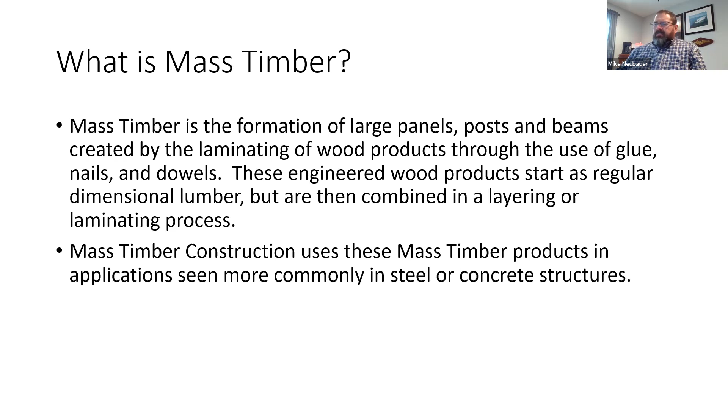Okay, start off with just what is it? Mass timber is really just large panels and beams that are made of smaller pieces of lumber. So it's laminated lumber through either nailing, doweling, or glue. In a little bit, we'll talk through the various types of mass timber components that are used in various parts of the building process.

I'm going to show you a couple of examples up front on the types of buildings that are out there now. Start with the absolute largest right now. Believe it or not, it's actually in Milwaukee, Wisconsin, the Ascent. It's a 25-story luxury apartment building. It just opened up this summer. And we will talk also about building codes and the heights that can be built under the international building codes.

Let's look first at the Ascent here. Well, it's taking longer than I expected. Okay. So here what we have is a podium, and then there's 19 stories on top of it, is what these pictures cycle through. But I did at least want to show you that.

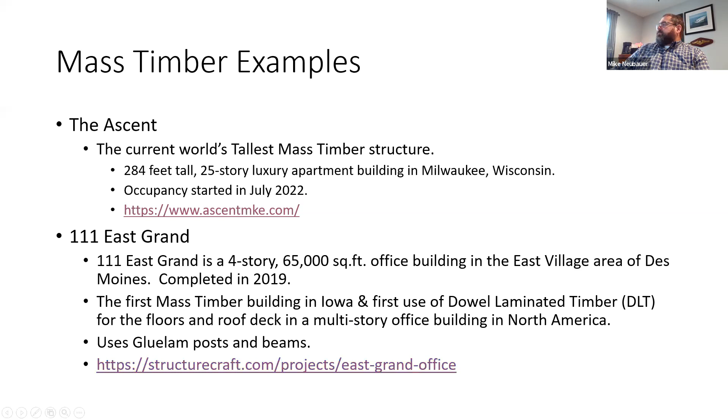So you can see in this, really, you've got beams and columns or posts, and then the decking. The decking on this, which is the floor or the ceiling, depending on where you're standing, I guess, is actually called dowel laminated timber, which is a form of mass timber, but it's individual pieces of lumber that are doweled together, and that's what holds them together. Believe it or not, there's actually not any glue used in it at all.

And let's see. So you can see the building here. These columns here are actually steel columns that are clad on the outside to look like that. But the rest of the building, other than these along the side here, once you get up inside the building, are all mass timber construction.

What's interesting about this one is this back wall here is a concrete shear wall that separates the parking garage area from this building. They are physically separate, but that's a little different setup. And we'll talk a little bit more about the concerns that come when you have vertical structures of concrete or steel tied in with the wood.

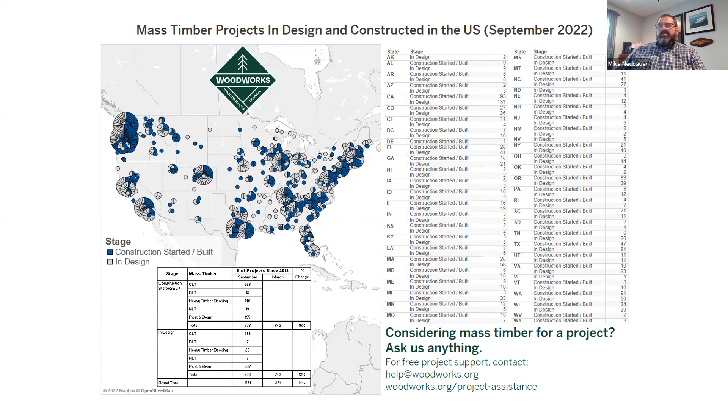This to me tells me that we're going to see some acceleration in this type of construction. And that was really the first thing I wanted to do, is just bring an awareness to everyone that this is out there now, and that it appears to be accelerating. You can see that just from March to September, there was a growth of 90 some buildings into the design, and a similar number, almost 100, in the under construction. So it is definitely a growing area. It's still a small number, but it is definitely growing.

Okay, now I want to talk a little bit about how mass timber is different than light frame, the typical house construction that you see, or commercial buildings that use normal frame construction. The biggest differences really come in the type of components that are used for the structure. In light frame construction, you're looking at 2x4s or 2x6s for the vertical components, the studs in the wall. And then the horizontal may be 2x6, 2x8, 2x10, or even 2x12s. Or you may see laminated veneer lumber, especially where you're looking for larger spans, something that has to go across a bigger distance without any kind of support in between.

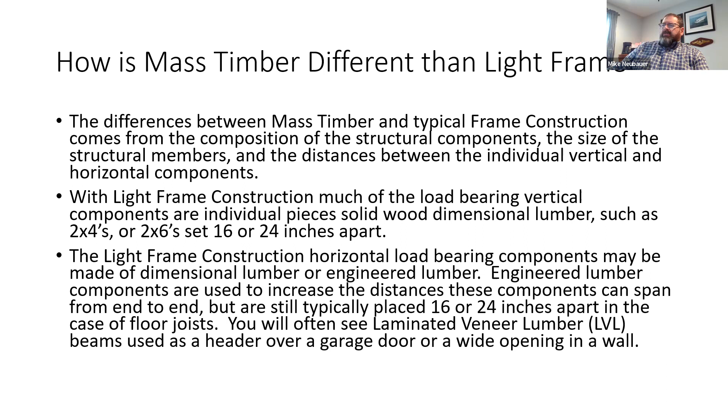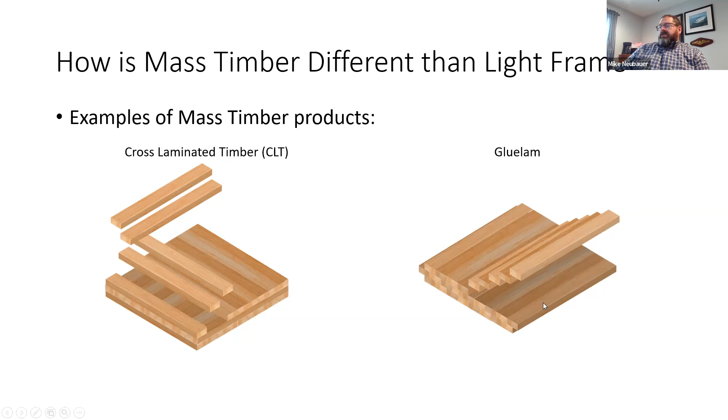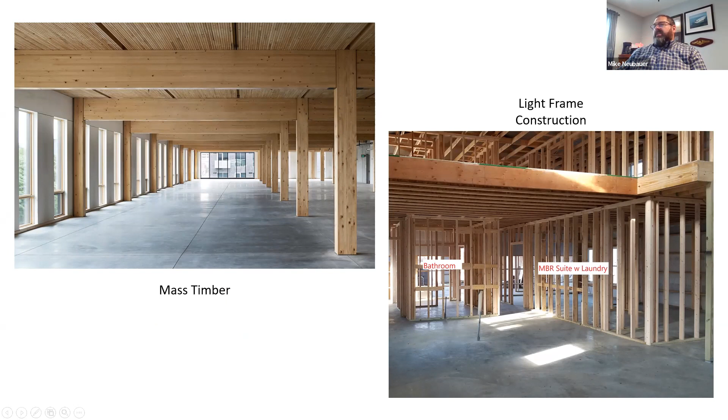Dowel laminated timber is very similar to the nail laminated, with the difference being that instead of nails, you're using dowels. The dowels typically fit very, very tight, to the point that the manufacturer will use a moisture difference between the main components and the dowels. The dowels will be dried down to where they shrink in size slightly, and the moisture will be a little higher on the actual dimensional lumber that's used. So when it's pushed together and they acclimate, you'll see the dowels swell slightly, which will increase their holding power.

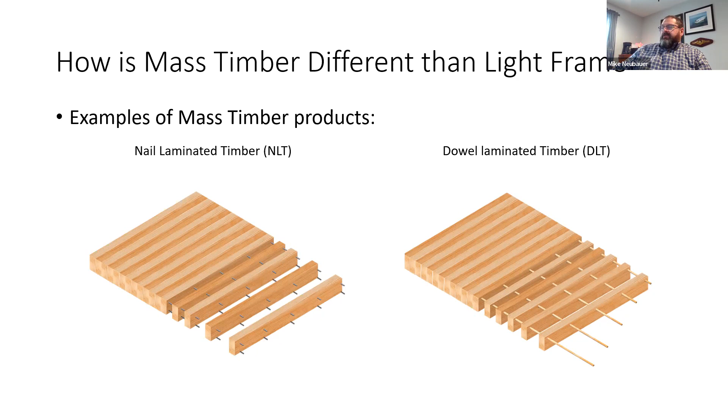Advantages of mass timber. The first one is really decreased weight. When you compare to other types of construction where you can have large spans between columns, such as concrete or steel, obviously the weight of wood is much lower. The advantage there is that if you don't have as much weight above the ground because of the structure, that means a smaller foundation. It also means that because there's less mass up there that can be swinging around in an earthquake, plus the flexibility that's inherent in wood, you actually have some improved earthquake resiliency.

And another use here, because of the reduced weight, is that you can use mass timber over an existing building. Out in the Northeast, where I actually do my underwriting, mostly New York, you'll see a number of projects where they're adding stories on top of an existing building, and this really lends itself well to that, because you've got less weight up there that you're adding.

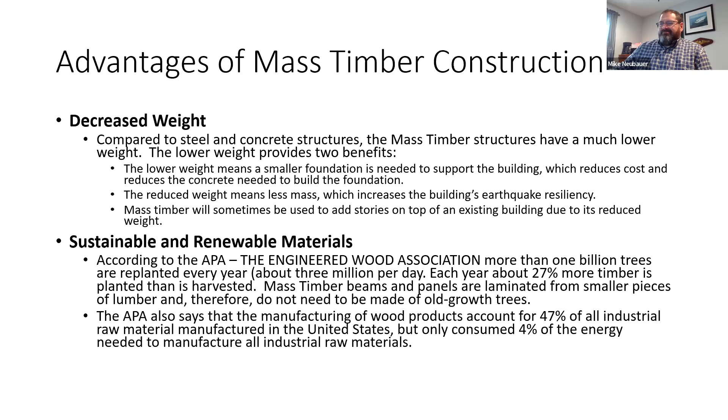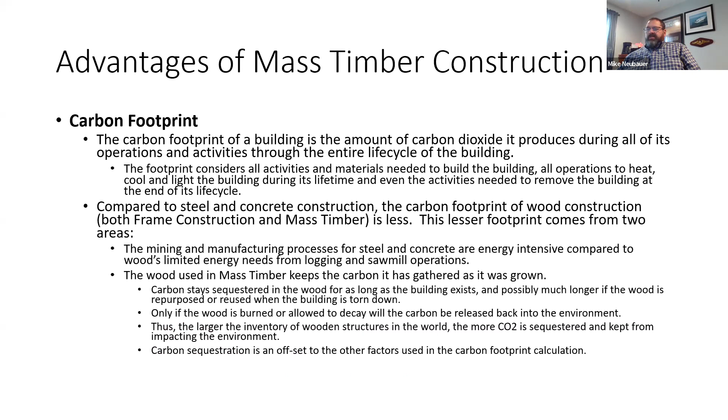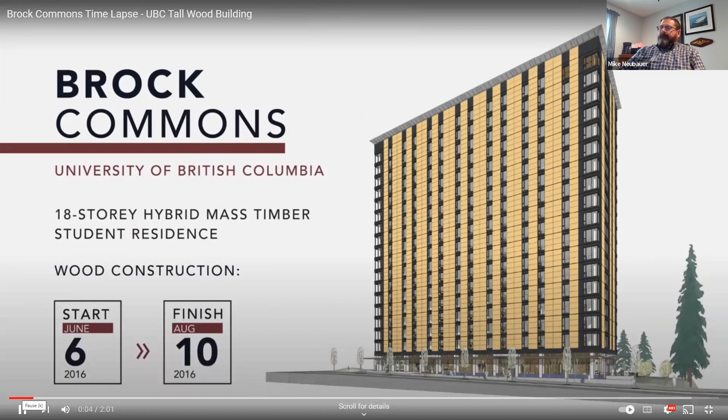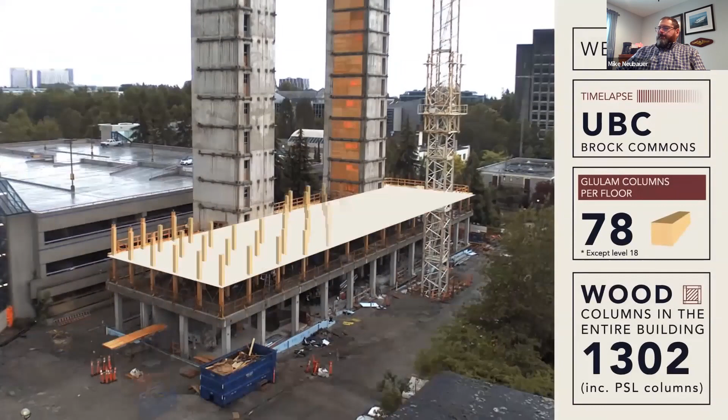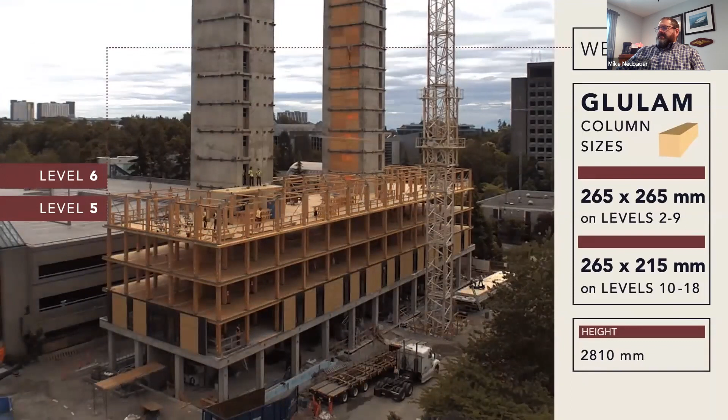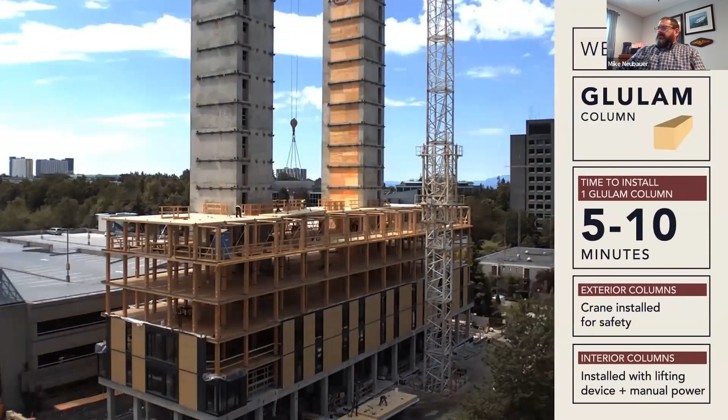So now we're going to look at a couple of examples. The first example is Brock Commons. It is a job that was up at the University of British Columbia, 18-story building, 9.5 weeks to complete the structure and get it enclosed. We'll just play all the way through this. So you can see they did have a 1-story podium here. Three weeks in, and they're already up on the 5th floor. And time to install a column, 5 to 10 minutes. Doing 2 floors a week.

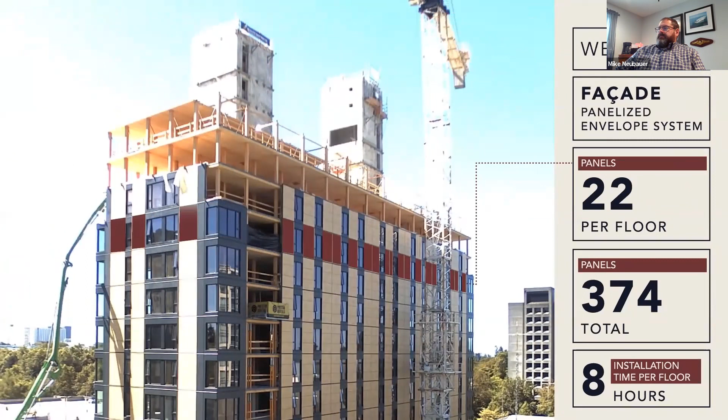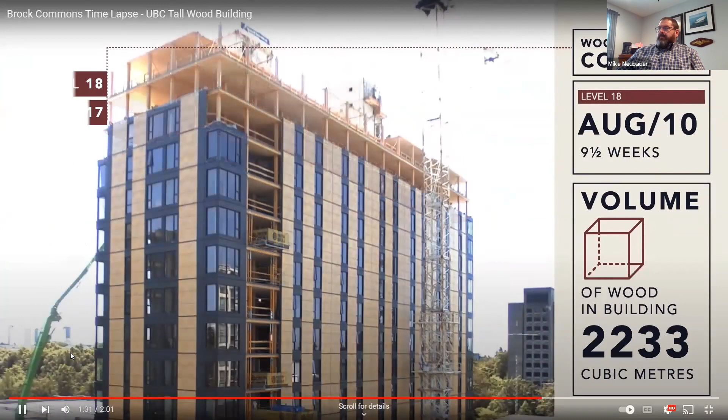Okay, they made the wood structure complete, 9.5 weeks. Wood in the building, 2,233 cubic meters of wood. That's a lot of carbon that's been held. When you talk about carbon sequestration, one of the things is that as long as that wood continues to exist, that carbon that grew those trees in the first place, with the CO2 and photosynthesis and all that, stays within that wood and will be there indefinitely.

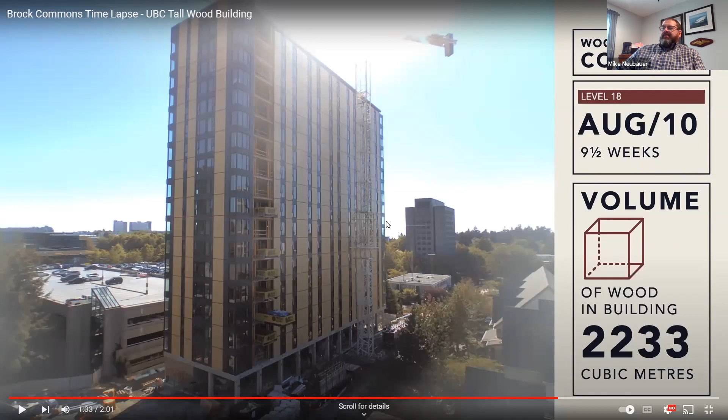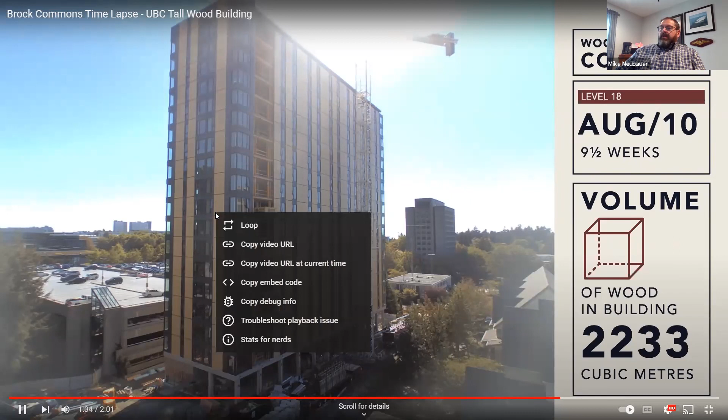It's only if you were to tear it down and it decomposed, or if you were to burn the wood, that the carbon would be released. So it's possible if this wood is recycled that it would never go back into the atmosphere at all. Okay. We'll get rid of that.

The next one we're going to look at is just a small piece of a video where you can see the construction process from up close, where they're talking about the cost savings that comes from the wood and the weight and the less materials or less labor costs.

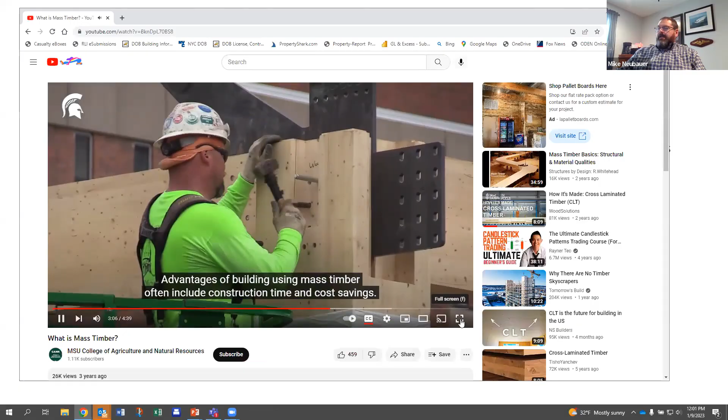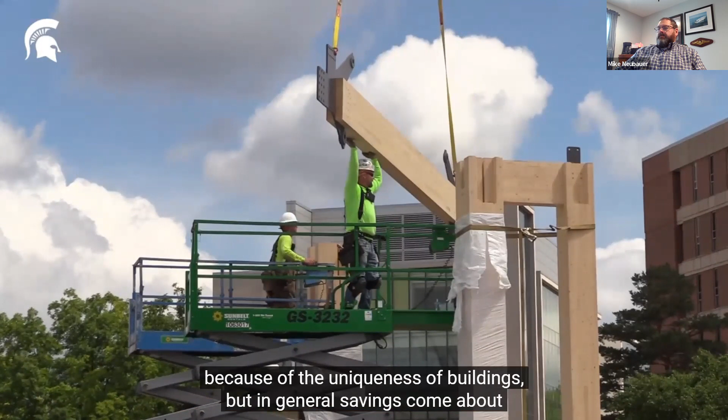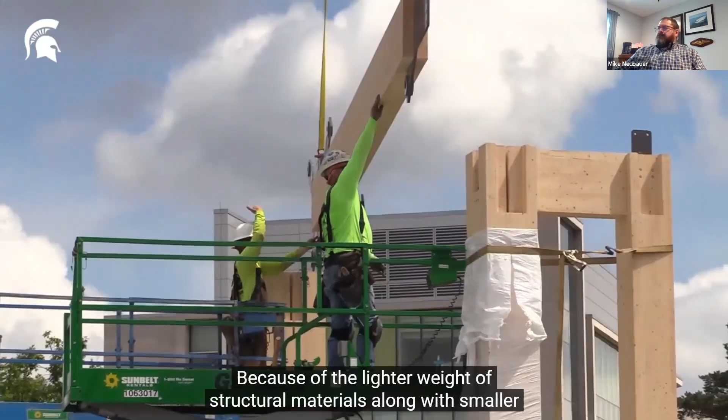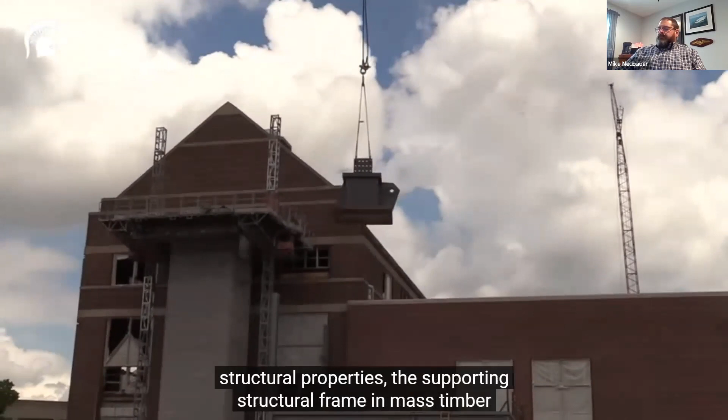Advantages of building using mass timber often include construction time and cost savings. The sources of these savings will vary from project to project because of the uniqueness of buildings. But in general, savings come about because of the relative lightweight of mass timber elements compared to other construction materials. Often this means being able to use a smaller crane. Because of the lighter weight of structural materials along with smaller cranes, we also see smaller crews. Because CLT decks and wall panels have inherent structural properties, the supporting structural frame in mass timber buildings often consists of fewer individual components. This means fewer pieces to lift into position, meaning faster time to completion of the structure.

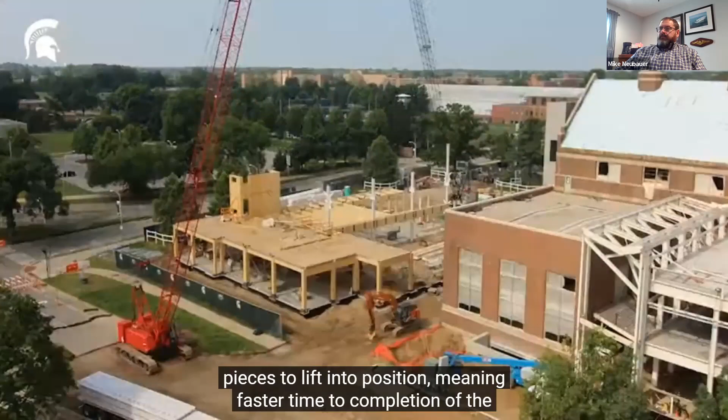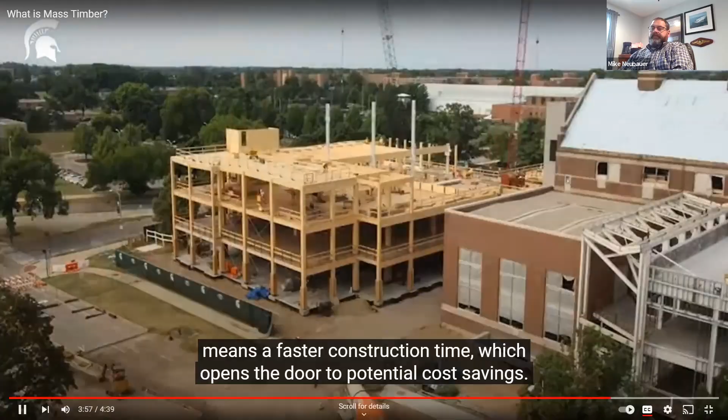The net result of these changes in the construction process means a faster construction time, which opens the door to potential cost savings. I hope you've enjoyed getting a chance to look at the STEM building on the campus of Michigan State University that's under construction.

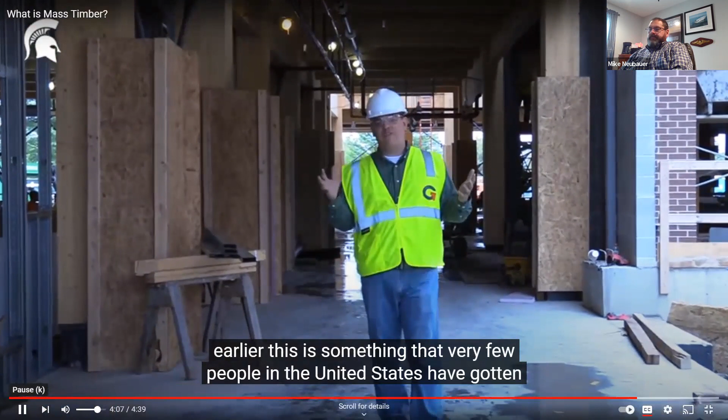Like I said earlier, this is something that very few people in the United States have gotten to see before. So I hope you've enjoyed this glimpse into something that we expect to see more and more of in the United States over the coming years. Be sure to come back to campus in the fall of 2020 when you can visit the STEM building after it's been complete.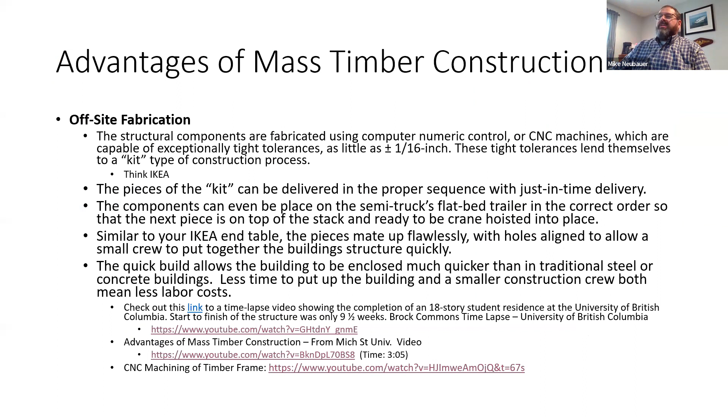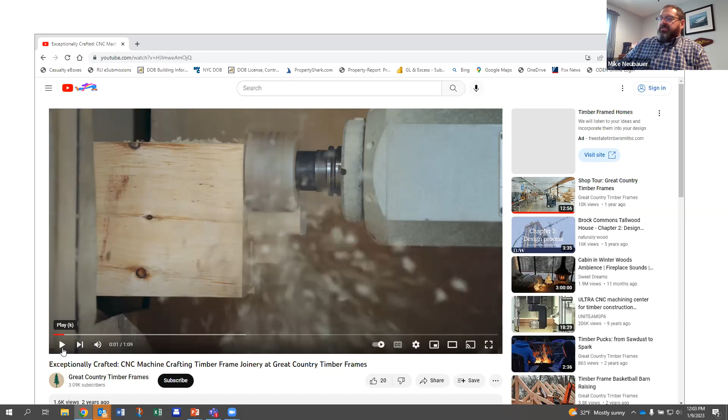The last video I want to show you here is actually the CNC machining process. This is a short minute-long video, but it gives you some kind of an idea. Now what you're looking at here is actually timber framing for what would be a builder of a home. But the only real difference in the process is going to be in the wood being one piece versus laminated that you would see in mass timber construction. But similar machines, similar tooling.

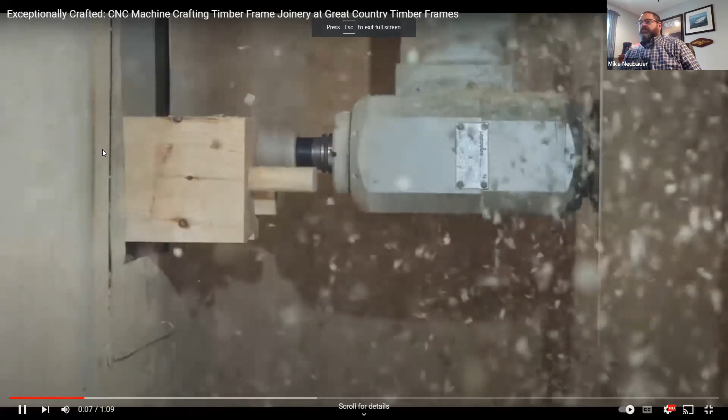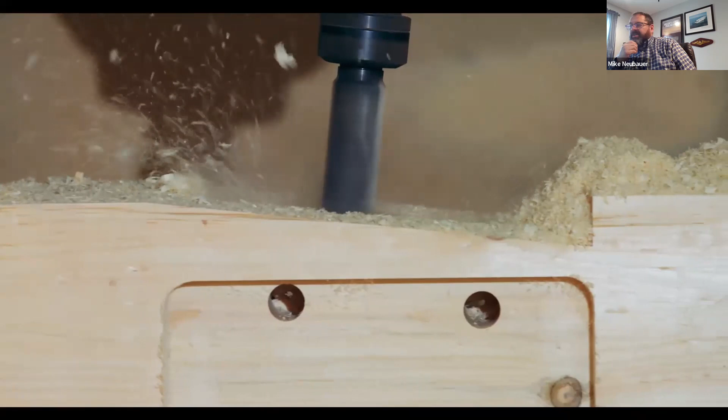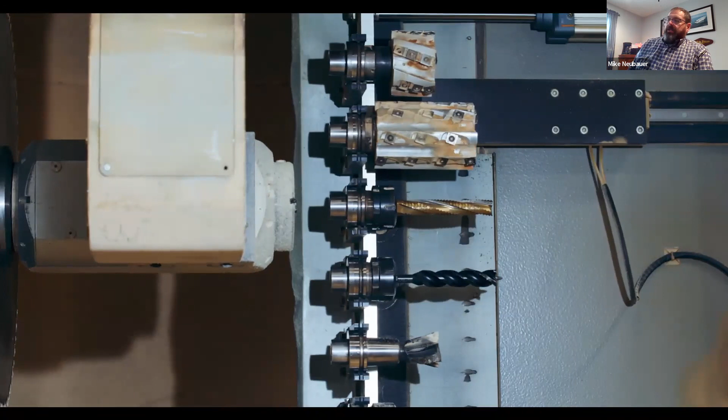Look at the precision at which it cuts that angle out. Just hits it exactly right. This is an automated tool changer.

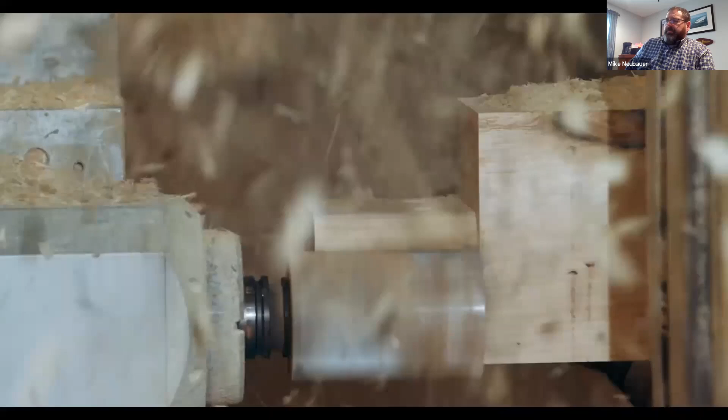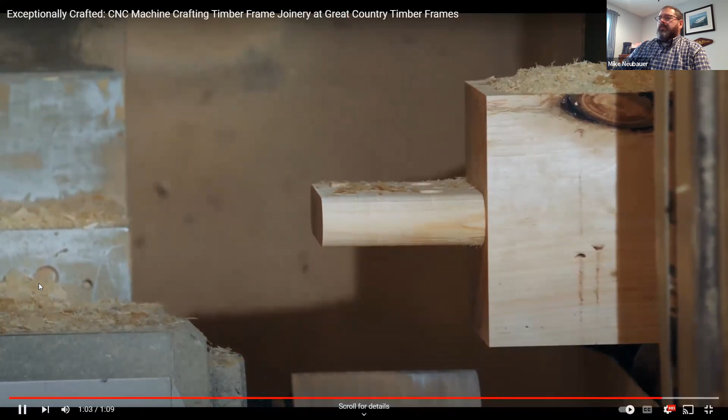Let's see, okay. Other advantages of mass timber construction: thermal performance. Wood has some insulating capabilities on its own that are about 10 times that of concrete and 400 times that of solid steel. So one of the advantages then is you don't really need any

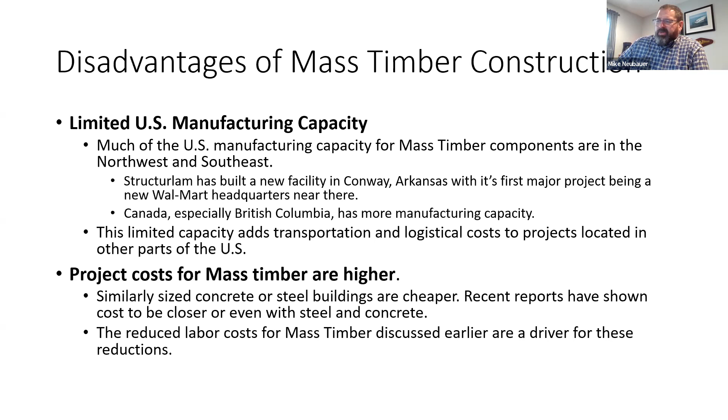Limited expertise. This is still fairly new, especially in the United States. But there are some areas that have expertise that can help. So one of the things with mass timber is that because the design and the manufacturing work for the components is done up front, you really need all that engineering and design right on the front end. And then that's coupled right into the manufacturing process. And so this stuff all takes a while to get there.

And with limited experience in this within the country, the number of engineering and architectural firms that have had experience is somewhat limited.

I saw a video on the Ascent building, which, by the way, came from the PBS station up in the Milwaukee area, I believe, and it actually interviewed the lead architect on that job, and he said that he had never built a mass timber building before he decided to build the world's tallest one. So he said he knew about 5% of what he needed to know. Boy, talk about jumping into the deep end. So he's certainly confident in his abilities, I guess.

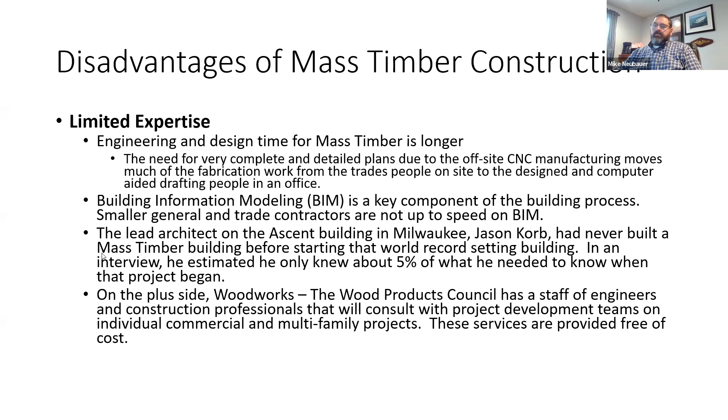One of the other disadvantages here is really building codes. The 2021 International Building Code is only in about a fifth of the states right now, so it's still making its way. And actually, there's a 2024. It looks like every 3 years a new International Building Code comes out that changes things, tries to keep up with technologies. And you'll see in another slide in a little bit, from 2015 to 2021, the changes that allowed tall timber construction within mass timber to start to happen.

But you'll see that there are still a number of states, New York as an example. The city of New York has its own code separate from the state of New York, and they're still on a 2009 International Building Code. And so they're limited right now to 6 stories. There was just recently a condo building completed in Brooklyn. That was, I believe, a 6-story building. But there's not nearly as much as you would have expected from such a large metro area, and that's because they're just not up to date on the building codes.

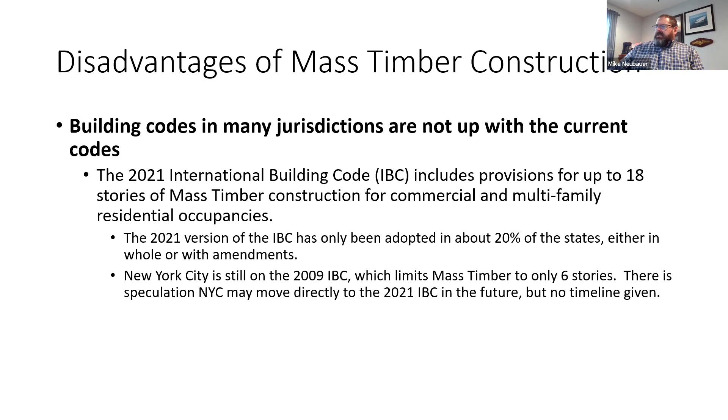And another disadvantage right now is a lack of knowledge within the insurance space and in the financing of these projects. On the insurance side, ISO several years ago did a paper talking about mass timber construction and how it was different than frame construction, but they said they really didn't have any reason to separate mass timber out from standard frame. So if you were to look, you'll see that mass timber still fits within the frame construction definition. Eventually maybe that could change. We'll talk a little about fire coming up here too, and so maybe you can see some differences here.

And also on the financing side, mass timber, because of the way it's designed and manufactured on the front end, there's a lot of value add that's done before any materials ever get to the site. They're already machined, they're really just ready to put up.

It's not the normal S curve you might see in construction of a frame building, where raw materials come to the site and then slowly over time, as walls get put together and go up, the costs start increasing. There's a lot more cost before it ever hits the site, and then it goes up quickly. So that changes how early in the process the financing needs to get the cash out there to pay for all of these materials that are coming in already pre-finished.

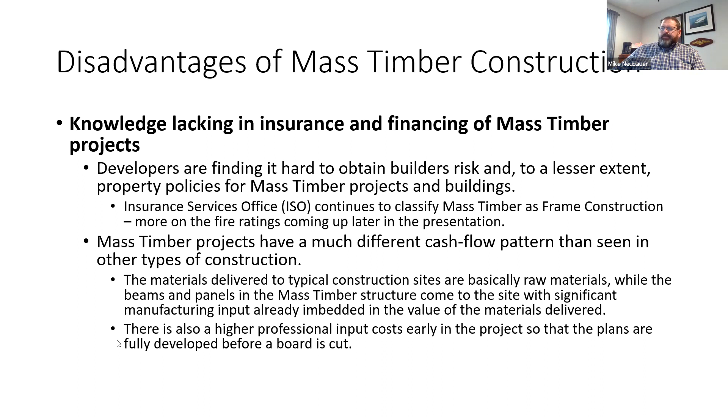Mass timber fire rating. One of the things that was necessary in order to allow for the tall buildings within the mass timber classifications is being able to meet the fire codes, 2 or 3 hour codes. You'll see that there has been testing done, and it continues today. There's still more and more testing, but what they're finding is that mass timber acts more like a tree than it does like normal 2x4, 2x6 frame construction.

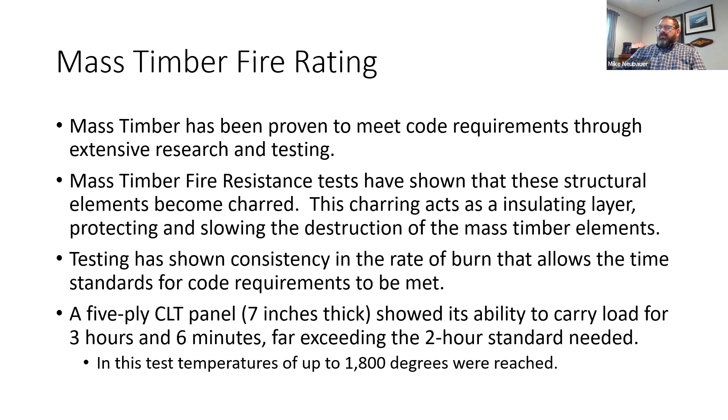Here the example is a 5-ply cross-laminated timber panel, which is about 6 or 7 inches thick, that was able to carry the load on it for over 3 hours, far exceeding the 2-hour standard. You'll see in the next slide how that plays out in the actual wood itself. When the dimensions needed to carry loads are determined, in order to meet the fire rating they have to be essentially oversized so that as they burn down, you can still meet the rating.

What you see here on the right hand side is the charring on the outside of the burning piece of mass timber lumber, for lack of a better term, which will actually act as an insulator to keep the inside cool. And so it slows down the process. You've seen how fast kindling goes when you use it to start the fire in your fireplace. But the large logs can last for several hours before they're burned up. That's because as it continues to burn deeper and deeper, it takes a while, and that outside actually helps to slow down that process.

With a 2x4 or 2x6, the normal dimensional lumber that's used in frame construction, you've got wood that goes up quick and is gone. Now the lumber that's actually in here is no different than those 2x4s and 2x6s. This is still spruce or pine. It's still the same lumber. The difference is just that because it's made bigger, it actually slows down the process. Individual 2x4s would lose their structural, load carrying ability very quickly, where this won't.

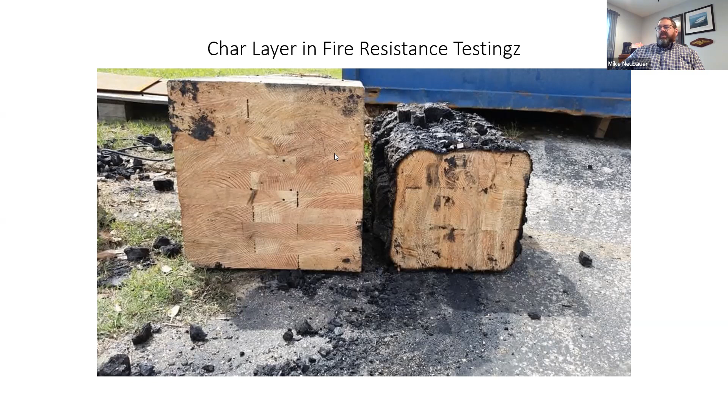Okay, 2021 International Building Code. When you look back at 2015, this type 4, now HT, was HT heavy timber. You're limited to 6 stories, 85 feet maximum, but now there are new classifications that let you get up to 18 stories, 270 feet, large area. And this is across really all occupancy types too. When 2021 came out, type 4 became type 4 HT along with type 4 A, B, and C. So you'll see that now it's split 3 different ways.

One of the big differences between the 3 is how much fire resistant covering there is, drywall, that gypboard. In here, almost all of the structure needs to be covered. In this one, there's a percentage that can be uncovered, and actually with the 2024 code, that percentage is going up to 100%, as continued testing has shown that it'll get the fire rating needed even without that protective layer on the outside. And then here we're already at 100% in the type 4C.

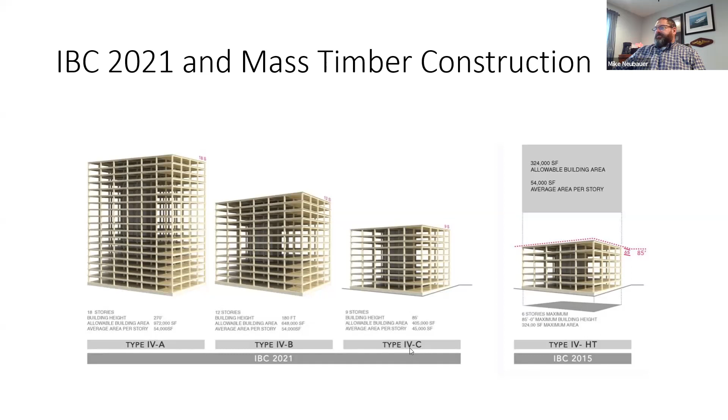Okay, design challenges within mass timber. There are a couple of things worth mentioning here. The first one is designing for differential movement. If you have any kind of structure adjacent to the mass timber that doesn't compress, settle, or shrink from the load at the same rate, such as that Des Moines project where there was a 4-story concrete shear wall that didn't move, but the wood can, you've got differential movement between the concrete and the wood. So you've got to design into that building the ability for that movement to happen and still maintain structural integrity.

Another thing that I see a fair amount of papers and discussions on is acoustics, because now you've got bare wood in many cases, so in order to ensure you've got good acoustics, you really have to start taking that into account.